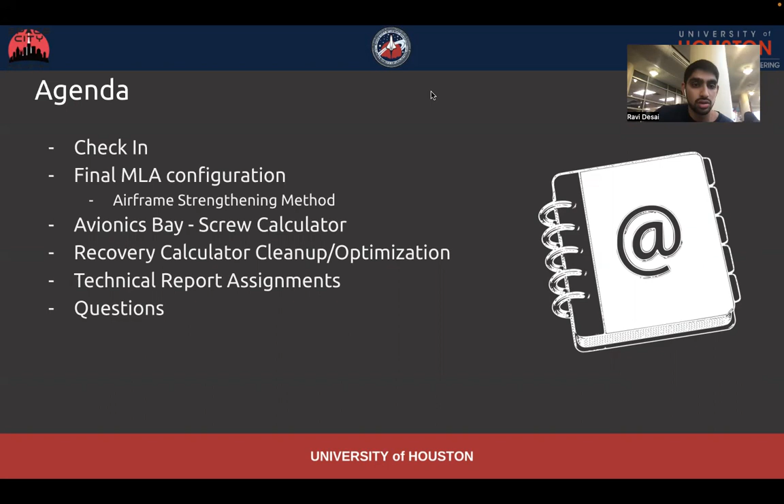So just the usual, some recent progress that you've made with the team, and also what are you looking forward to in the summer, but it can't be engineering team or school related. Something fun with our miserable lives. I want to hear. All right, I'll get started off. I think the thing that I'm looking forward to the most, besides competition, is just exploring a new city in Seattle. So kind of living on my own for 3 months and seeing how that's going to be, I think, is pretty exciting. Nice. Jealous of Seattle.

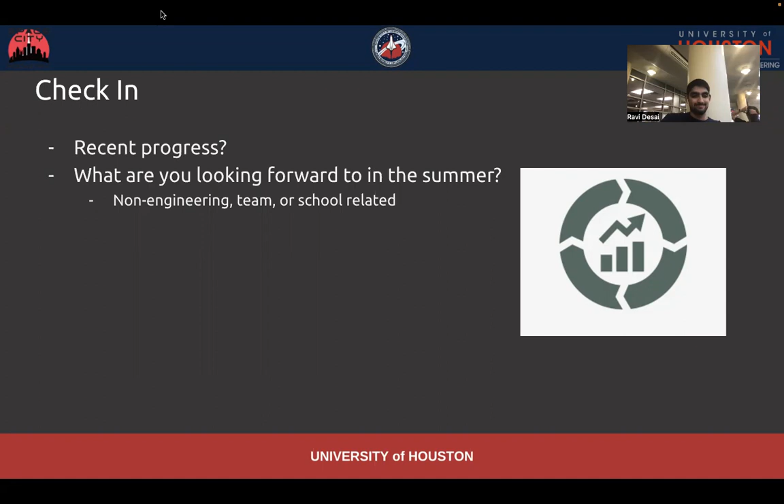Right, yeah, for me, I've just been trying to help out with the MLA FEAs and just determining what that system is going to look like in its final configuration. And also just discussing with Omar the screw calculator for the avionics bay and looking at if we can reuse Oberons or not.

I am looking forward to living on my own in the summer in the great state of Alabama. If I do manage to survive and come back, I think I deserve a medal. So we'll see what happens, but looking forward to running for my life.

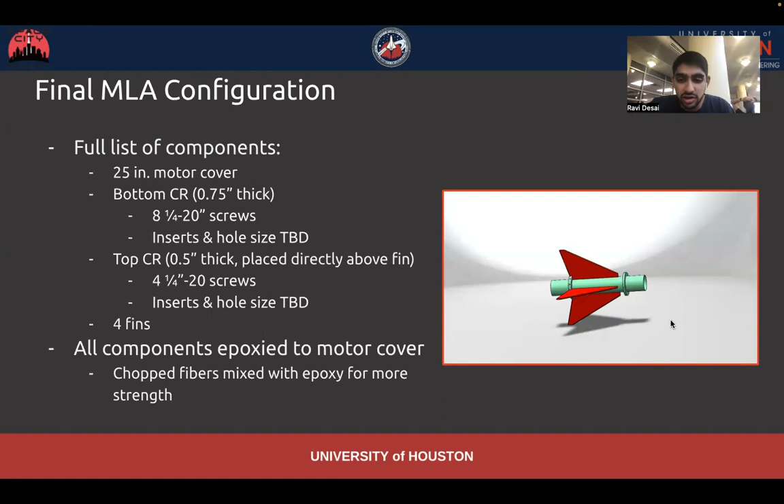All right, on a more serious note, the final MLA configuration. So the CAD, this is thanks to Arturo, big shout out, but it is a little incorrect just because of the 1 inch gap here. I think it will be better if we just put the centering ring pretty much right on top of the fin, because we're just losing out on potential load that it could be supporting by moving it further and further up. I do want to put this in OpenRocket and then see if that 1 inch makes a big difference with stability. I highly doubt it will. So that's why I think we're just gonna put it next to the fin.

But the full list of components: the 25-inch motor cover, the green tube, the bottom centering ring, which you can see is a little thicker at 0.75 inches. It'll have a total of 8 1/4-20 screws. And the inserts and the hole size are still to be determined. I think once we know what inserts we want to use, then we'll have a corresponding hole size. And then from there, which I'll talk about in the next slide as well, we can find the correct bushing size. But this also includes one top centering ring, which is 1/2 inch thick directly above the fin.

And that will have 4 1/4-20 screws, the inserts and the hole size to be determined as well, and then the 4 fins. And as we know, all the components will be epoxied to this motor cover, and we're planning on using chopped fibers with mixed epoxy for more strength. Thank you, Arturo, for your comment.

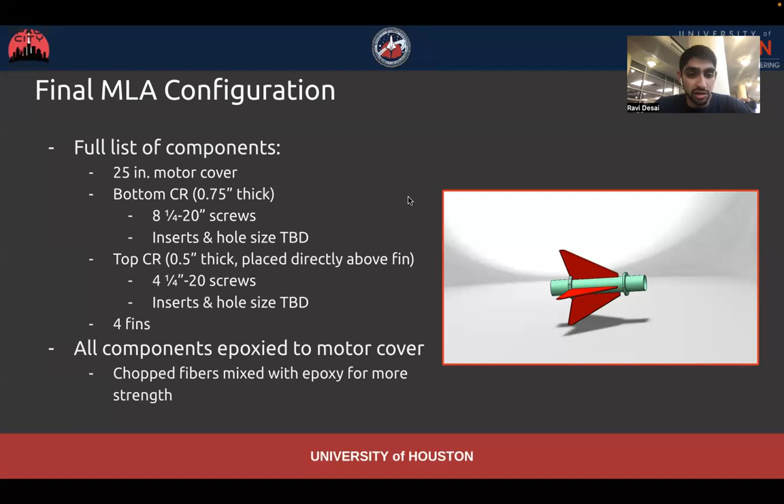Now for the airframe strengthening method, I think these are the two most feasible options of reinforcing the airframe holes.

If we use chopped fibers mixed with epoxy at each separate hole site, that'll allow us to reinforce the airframe just at the points at which we know there's going to be some high stress. But something a little more well-rounded would be a few wraps of carbon fiber or fiberglass on the inside. I'm not sure at what point the number of wraps becomes enough to start impacting our tolerancing and fit with the centering rings, but hopefully we can get enough wraps to where it doesn't impact, but still adds a good bit of strength and reinforces the airframe.

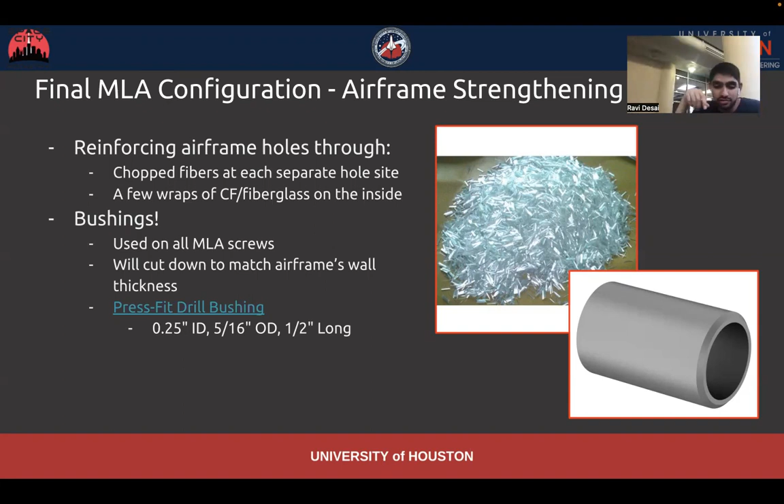Yeah, if you can't see what Irvin said, he pretty much said if we have one plate of the centering ring from the lab and then another plate on top of it, and then we try and drill a hole in between those two, then when the screw is going to be placed in there with the insert, and say we land and that screw wants to push up, then it could just lift off that top plate and then we're pretty much screwed from there if that happens.

But I think there are different ways in which you can epoxy two surfaces together, because we did that with, I know it's different, but Oberon's wooden centering ring. We had 3 different layers and then drilled through the middle of it, and that held up fine. I know it wasn't load bearing, but the screw is definitely not going to be pushing on the wood too much. So I think the insert can really help with that.

But I do think it is definitely a concern, and we do need to figure out, I guess structures, how we're going to combine those plates, because that's definitely a valid concern, and maybe it's something we can ask. Yeah. Okay.

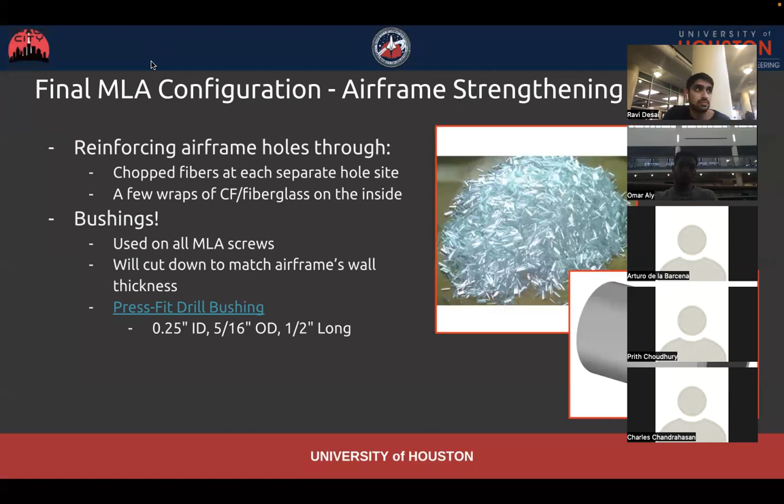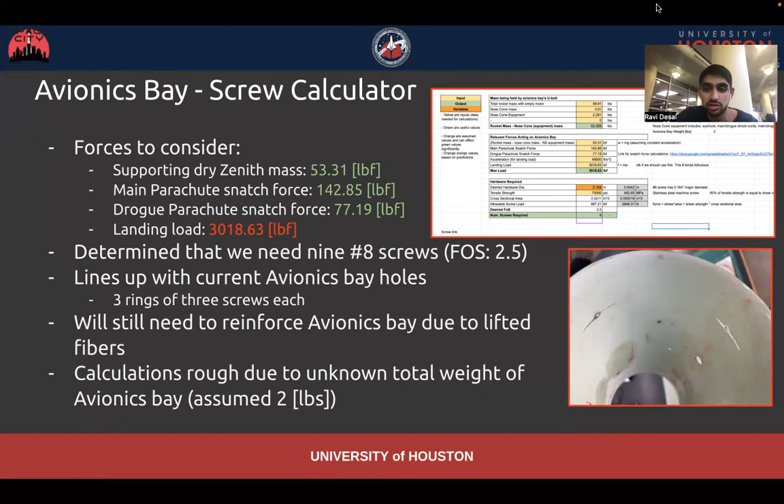So for the screw calculator, huge shout out to Omar, who's been taking charge and working on this. He came up with the forces that the avionics bay will experience throughout the launch and throughout flight.

The first force to consider is obviously it's going to be supporting the dry zenith mass, which we have right now at around 53 pounds. It will also experience the main parachute snatch force, which is just under 143 pounds, and the drogue parachute snatch force, which is lower at 77 pounds. But then also the landing load, which we have at 3,000 pounds force.

And that was calculated by using the projected weight of the avionics bay, then simulating that same landing load, but only looking at the upper airframe and the fact that the avionics bay may want to move down the airframe while the screws are holding it in place. So that was around 3,000 pounds force, which is easily the most that we project the system to experience, worst case scenario. We determined that we needed 9 number 8 screws with a factor of safety of 2.5.

And we kind of manually fidgeted with it as well, because there are currently 9 holes on Oberon's avionics bay with 3 rings of 3 screws each. So this lines up pretty nicely, and we're able to reuse Oberon's bay actually.

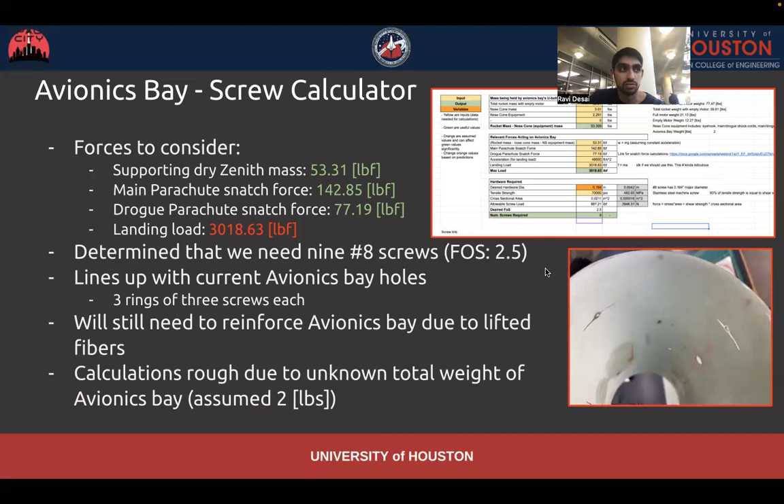The calculations are a little rough just because we don't know the exact weight of the avionics bay right now. I have reached out to Raj and Joe to try and get an updated number on that. But we assumed 2 pounds, so hopefully it's around there. And I think if it's a little heavier, we'll still be fine with 9 number 8 screws. It's just that the factor of safety won't be exactly 2.5, but I feel like that is already at a good spot where we can sacrifice a lower factor of safety a little bit.

All right, recovery calculator cleanup. So this is just kind of the same from last week.

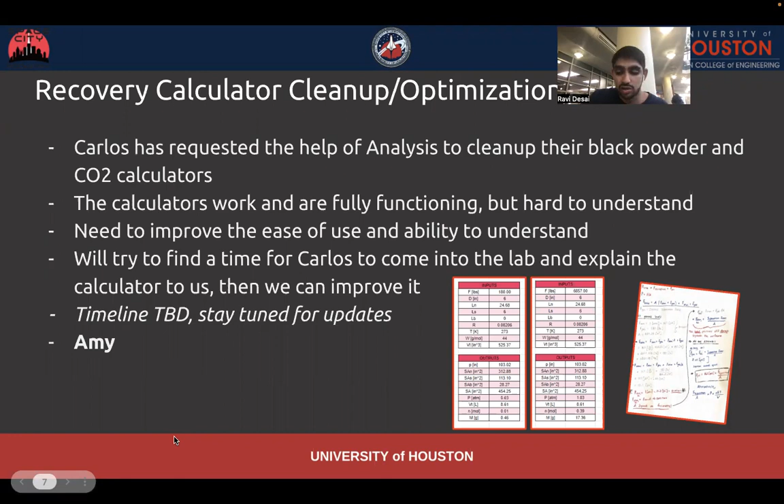Okay, the tech report assignments. That's the main part of what I want to talk about today. I just wanted to provide a rough overview of what analysis is responsible for on this document.

We have an overview of our subteam. We will be talking about the Zenith flight simulations on both OpenRocket and RockSim, the nose cone drag simulations, the code we built for the OpenRocket drag force, and the CFD from Nico. The boat tail drag simulations were a comparison to justify the use of a boat tail without just saying we saw another team use it and it works. Hopefully Nico can do a side-by-side of a simulation with the boat tail and without.

The overall MLA, so explaining the entire system, also working in the validation of the screw calculator and the FEAs. I think it will also be cool to talk about the different iterations we had and why we made major changes and how we ultimately ended up at our final product.

The fins, when we did the flutter and divergence calculations through AeroFinSim, but also designing for stability. And I know recovery has a ton of analysis and validation we haven't really helped out on this year, so it would be cool to offer some help if they need it, especially if we're going to be incorporating ourselves with their calculators. So I plan on beginning work on this tomorrow, and I can set up a separate document for analysis so we can all add our own figures and work into each section.

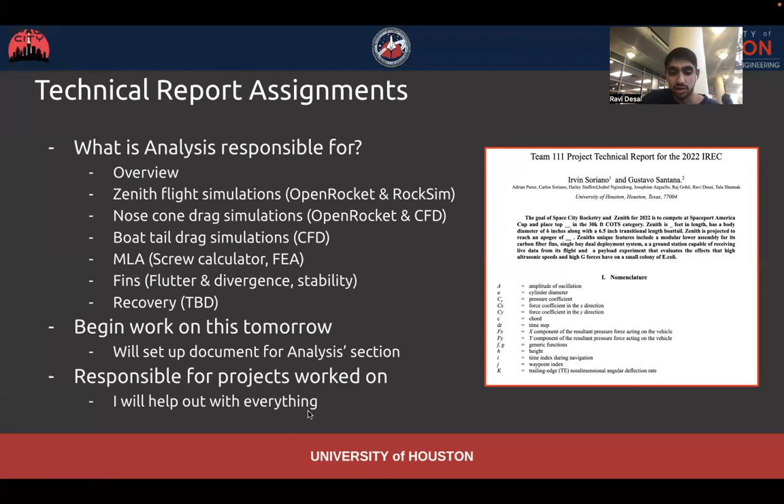Generally, you'll be responsible for the projects that you worked on. I'll try to help out with everything and answer any questions you guys have, and work on formatting and making sure things come across the way we want. For the assignments, I'll take care of the overview and then be helping you guys on everything else.

The Zenith flight sims, Amy and Will were the main ones working on that. The nose cone drag force was also Amy and Will, and then Nico for the CFD. Nico, I have your name in red just because I know you're extremely busy this week. If you could just provide us with the CFD, then maybe I can talk to you one-on-one about the results, but we should be able to incorporate it ourselves and talk about it as well. The boat tail drag simulations, Nico there, and the MLA with Arturo, Omar, and Prith, and the fins with Amy and Will. Definitely don't feel limited to what I've assigned you, and I will help you out since I know we're all busy this week with finals.

The final due date for the tech report is the 13th. However, we do want to have it completely finished by the 10th of May, which is next Tuesday in one week, at least the sub team section. So have all of analysis in our section complete in one week, which should be pretty easy.

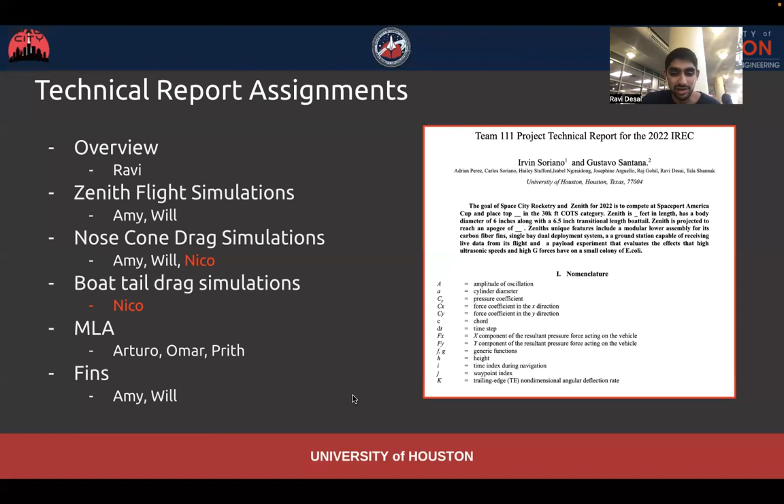Any questions for today?

How long does judging take? I don't know, because we submit the tech reports and all the documentation mid-May, which is before, like a month before competition. So I think they'll be able to tell us where we placed at the end of competition when we're there.

The award ceremony is the 24th or the 25th. The last day. Yeah, maybe the last day.